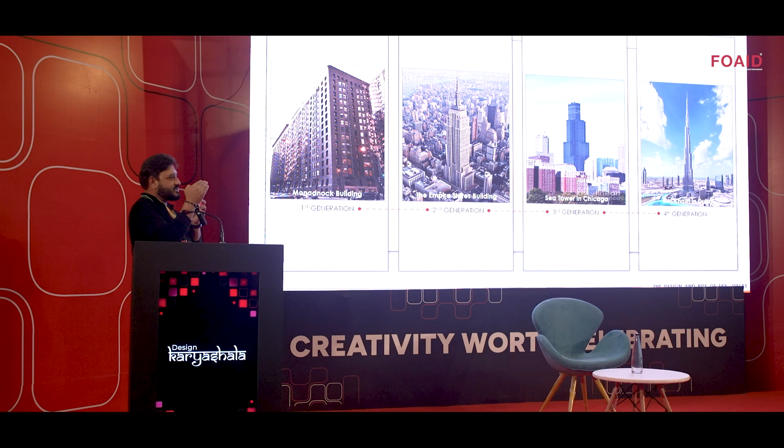The window ratio was small, and now we're in the third generation - complete unitized glass, DG glass, a complete glass facade. Now we have a combination of paneling and glass, and buildings are actually designed more on aerodynamics. A lot of people think designing a high-rise is very easy, but if you see Burj Khalifa, the shape has some reason - it was designed like that. It's not only the architect's design; it has wind loads, wind flows, and a lot of factors where the building shape is actually decided.

So what are sky villas? As I said, sky villas are residential spaces. So why sky villas? Because people may ask - I can own a villa, I have my own land - why should I have a sky villa? Sky villas are for when you have scarcity of land, and you get good panoramic views. Sky villas normally give you good ventilation because you're at a height.

It gives you a lot of fresh air, good sunlight, and good panoramic views, and you have a community to live. So these sky villas are just catching up. Some of the reasons: scarcity of land, increased demand of residential spaces.

Technological advancement also, of course. Now we have MIVAN technology. Before, a high-rise building of 40 floors used to take almost 4 years to complete. Now with MIVAN, the concrete walls and all, we can finish the building in almost two years if the sales are good.

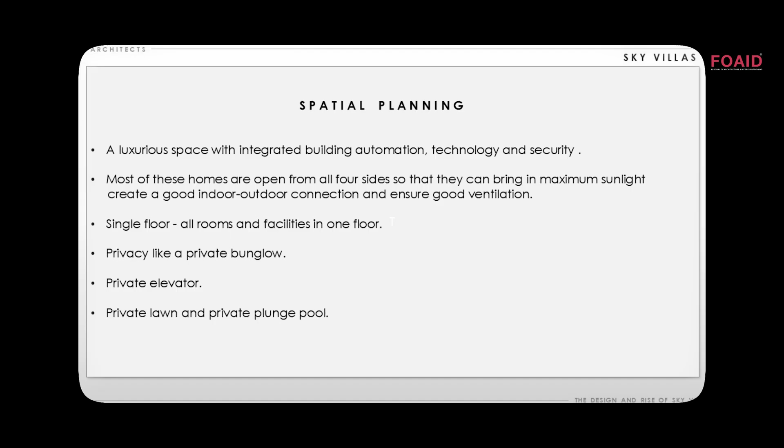Then why sky villas? Normally the frequent question we get from a lot of clients is: why sky villas? Why can't it be a duplex apartment? Why a single floor of 6,000 square feet, instead of a duplex apartment of 6,000 square feet spread over 2 or 3 floors?

But nowadays, even for parents monitoring kids, a lot of people are preferring single floor apartments because it's very easy to monitor. You are on the same floor, so all your living spaces, bedrooms, home theaters are on the same floor. It's very easy to have an eye on the kids and even the elders at home. When you're on 2 floors, it's always a little difficult to communicate.

That's why a lot of people nowadays are preferring larger floor plates. And of course, you have apartments with plunge pools, and then private elevators to your apartment. So it's a dedicated apartment with an access card.

So you can have multiple features like this. And because it's a single apartment, you always have that privacy, like an independent house in the sky. That's why we call them sky villas.

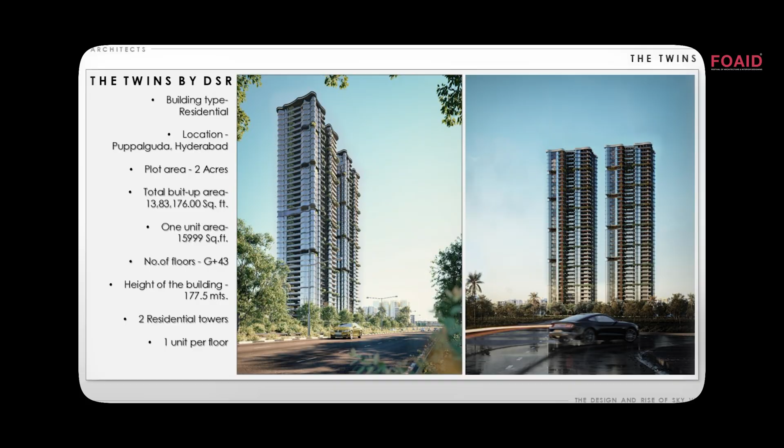So this is one of the first projects I want to show you today. This is the Twins, a twin tower we're doing in Hyderabad. We are halfway through construction - we have finished about 22 floors.

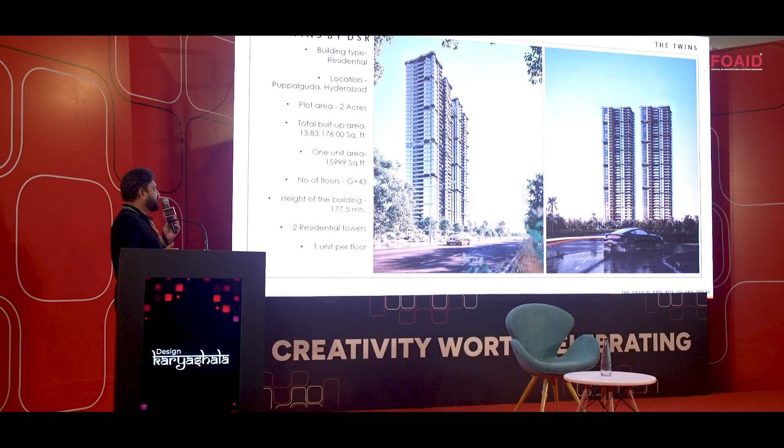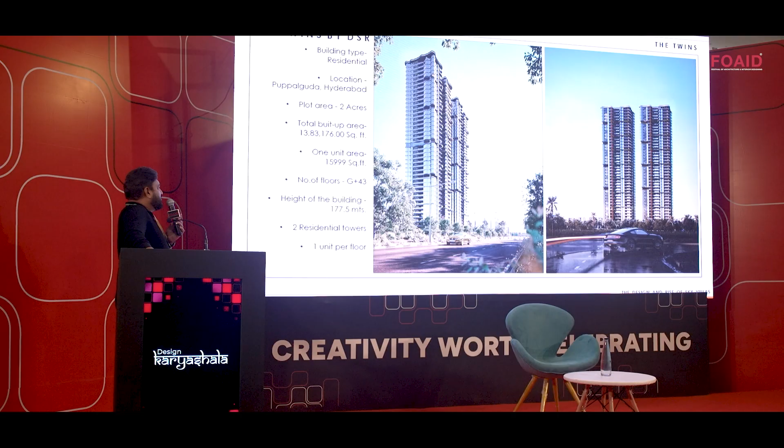The plot area is very small, about 2 acres, but still we could do about 88 apartments. So 88 apartments of almost 16,000 square feet each - 15,999 square feet. For each floor, you just have one apartment of 16,000 square feet. It's twin towers, and the height of the building is about 177 meters, with just one unit per floor.

If you see, this is the placement of the towers - we have a linear site with 2 twin towers. We have all the amenities on the ground floor. Ground and first floor have amenities like indoor banquet halls, multi-purpose hall, restaurant, lobbies, indoor badminton, and squash.

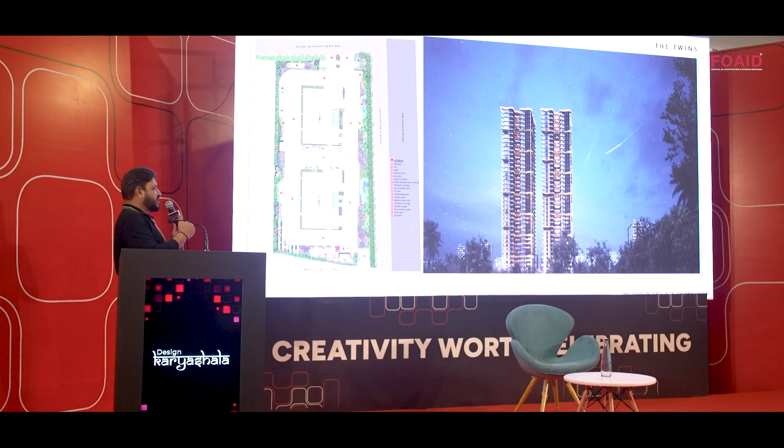So all the amenities are on the ground and first floor, and the first apartment starts from the second floor. This is how it looks. If you see the typical floor, the ground floor has the amenities.

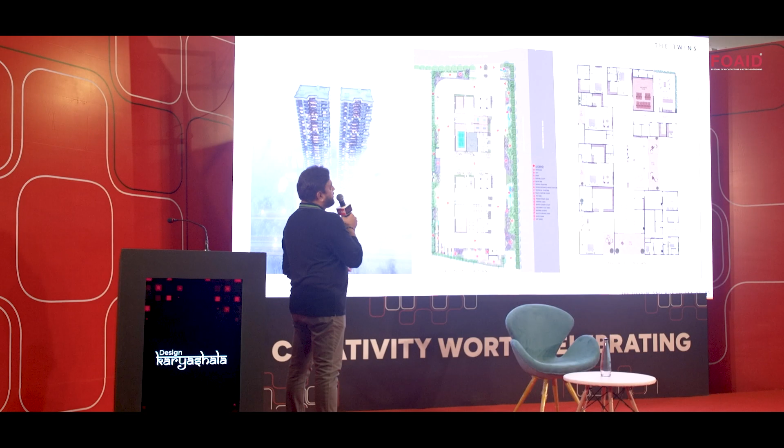A typical floor has dedicated entries on the right. If you look at the lift lobby, the core is attached, and then we have dedicated entry. All those lifts have access control.

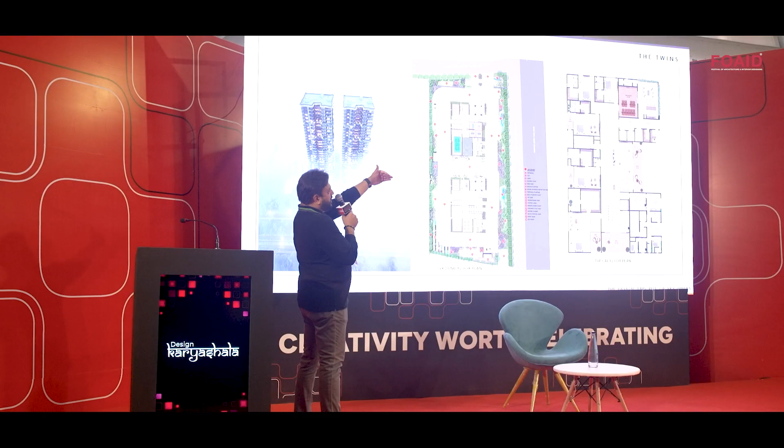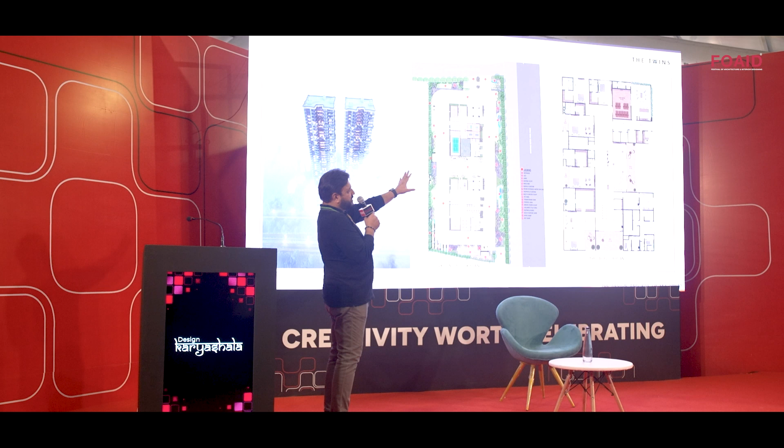Towards the right, you have the party area. We made the party area to one corner so that even if there are elders at home, when the kids want to party, they are not disturbed, but they're still at home. It's actually near the entrance, so people don't have to enter your residence - they can just walk in. We have an attached home theater to the party area.

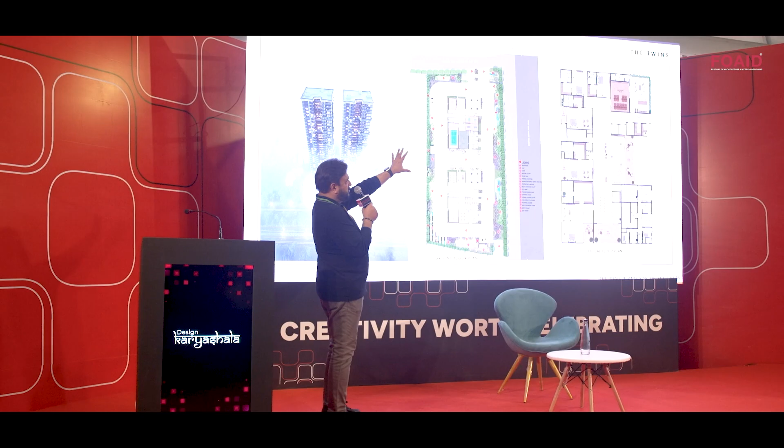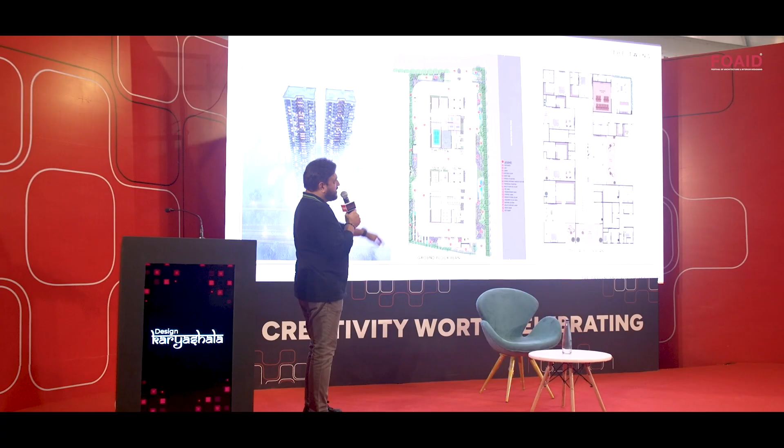This home has 5 bedrooms. We have maid quarters also tucked in the corner - 2 maid quarters, part of the kitchen. So we have the 5 bedrooms, home theater, party area, and large spanned living rooms.

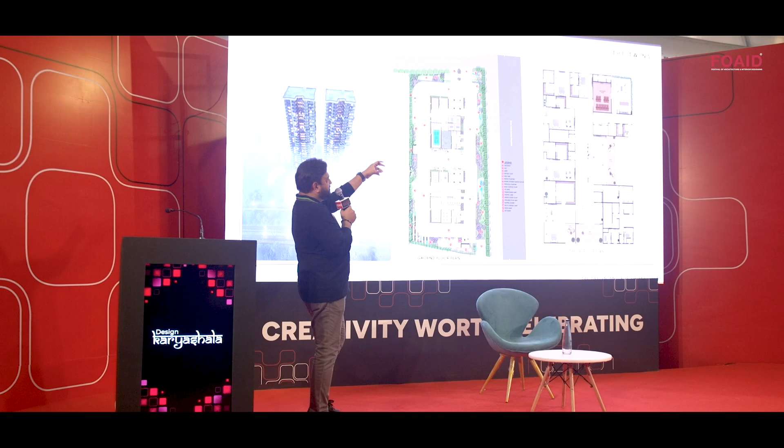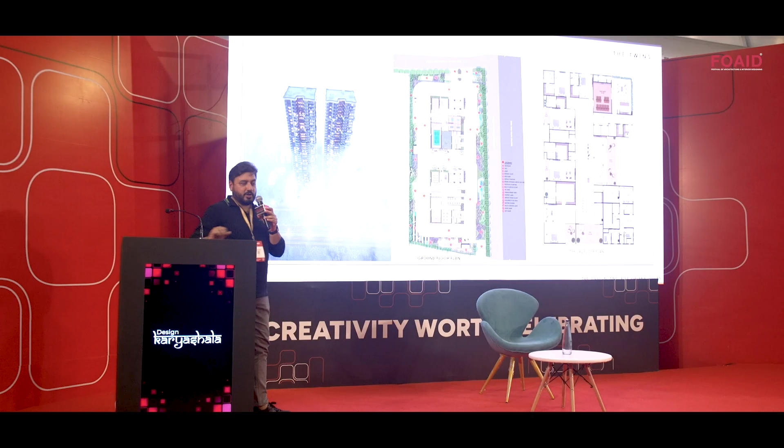Here we created these large open panels - the overall thing is very large format, each grid is about 30 feet. It was designed so the end user has his own chance to customize it however he wants - make it into 2 rooms or 1 room. That was another reason.

So this is how it looks. This is a curvilinear building - 50% of the building is glass, and 50% is concrete. This is also done in MIVAN.

And this can be done only when you have 50 repetitions - you should have at least 50 repetitions for each apartment. Then only this MIVAN technology will work. Otherwise, it will be very expensive compared to conventional construction.

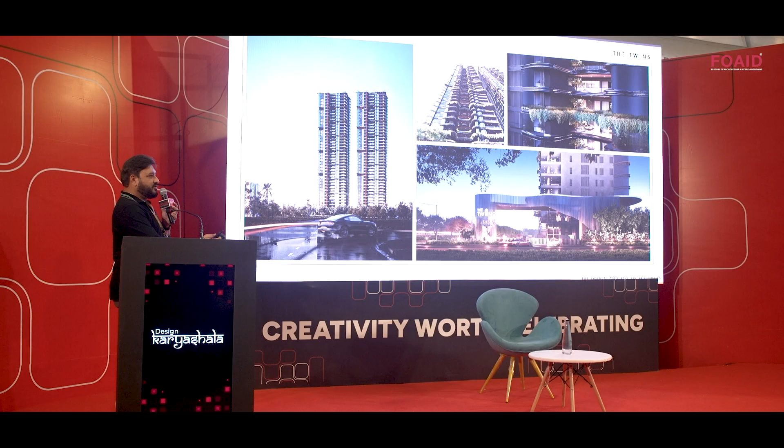So we have large balconies - I think we have 2 large sit-outs, about 500 square feet each. And then we have a dedicated party area also. So these are some of the visuals of the landscape.

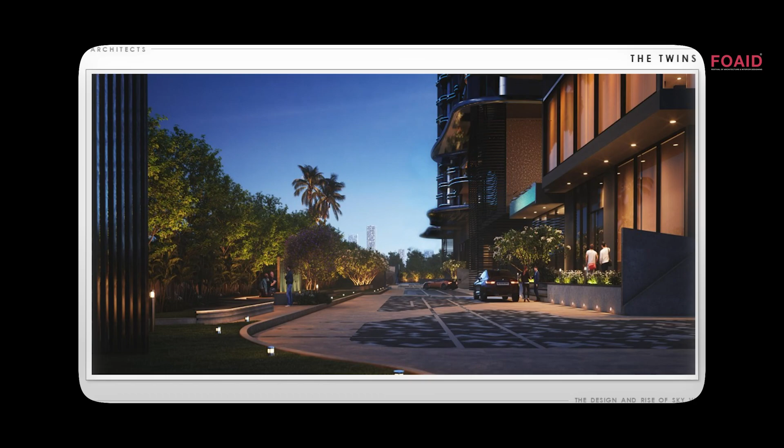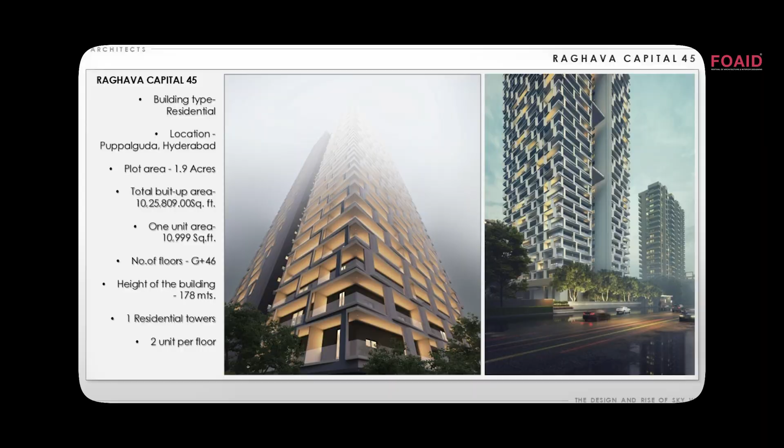So we move on to the second project. This is called Capital 45 floors, and it has 2 apartments on each floor, but each apartment will have its own privacy and will look very independent.

This is also under construction. We have finished about 15 slabs. This unit size is about 11,000 square feet. Each unit is about 11,000.

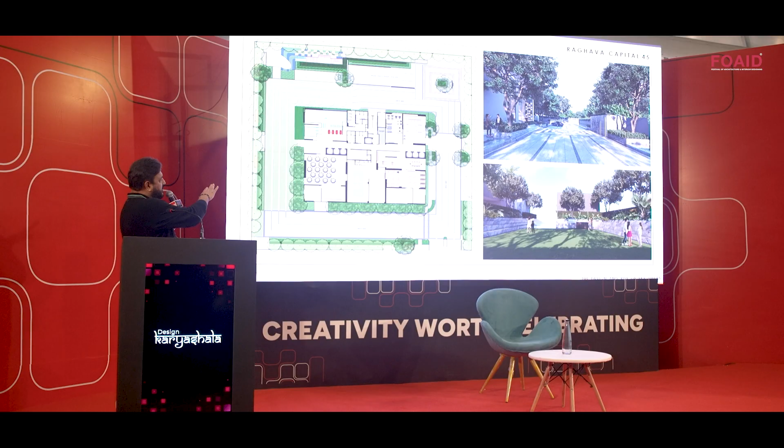Again here, because it's a single tower, all the amenities come in the ground and first floor. In this project we have an indoor heated pool on the ground floor, and a terrace pool also, apart from standard amenities like a multi-purpose shuttle, restaurant, and a multiplex screen.

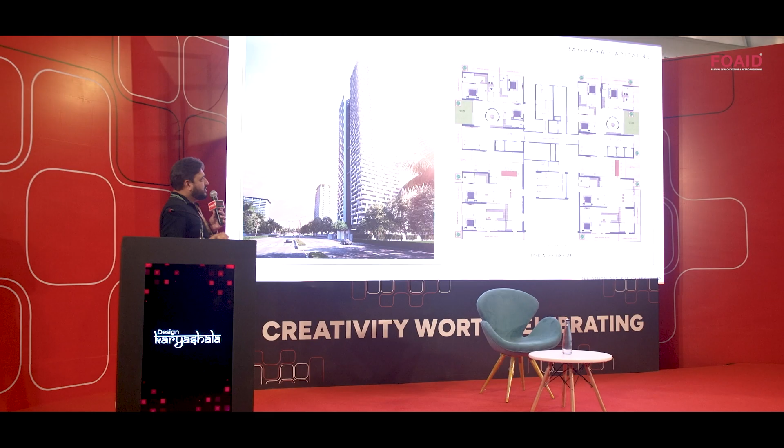So this is a layout. When you look at this, there are 2 apartments, but if you see the access of the lifts of each apartment, it's actually dedicated to that apartment. You don't feel you have a neighbor, because you come out of the lift, you have a lift lobby, and then it's your main door. The other apartment again has dedicated lifts, because the entries are from that side.

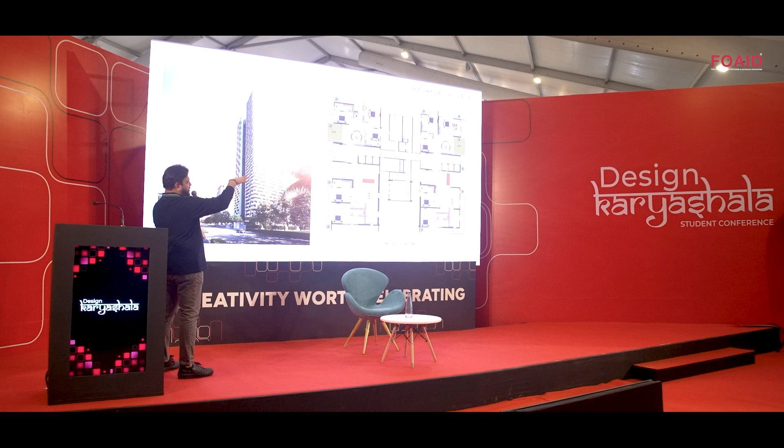Even though it's 2 apartments on each floor, you still have your own privacy, and each unit looks very independent of each other. The center core is just for service. We have given the maid quarters and the fire tower.

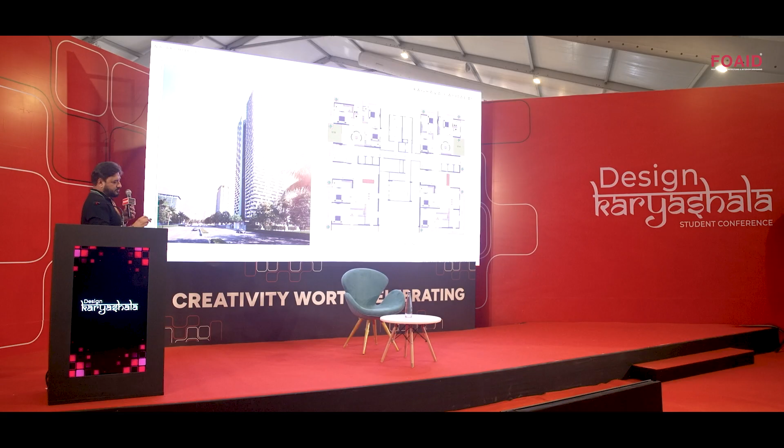This one also has about 4 bedrooms, a multi-purpose hall, and a home theater. When you do these large sky villas, at least one large covered sit-out is needed, say 300 to 400 square feet, because when you do a larger apartment, the volume and sizes of each bedroom should all increase.

It's not that one room we give big and then suddenly narrow it down. As the scale increases, the scale has to be shown in every room, not only in one particular area.

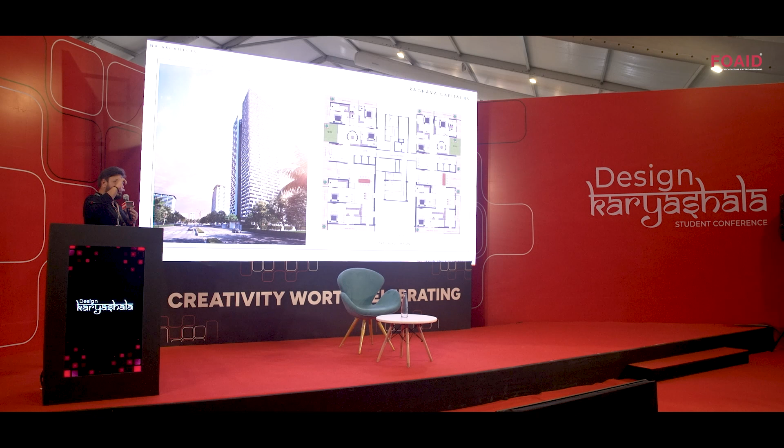Another important thing: when you do these large floor plates, the height of each floor has to be at least 3.6 meters. Because with large volumes, if the floor height is low, it doesn't give you that luxury feel. Normally for an apartment of 2,000 to 3,000 square feet, 3.15 meters is always good.

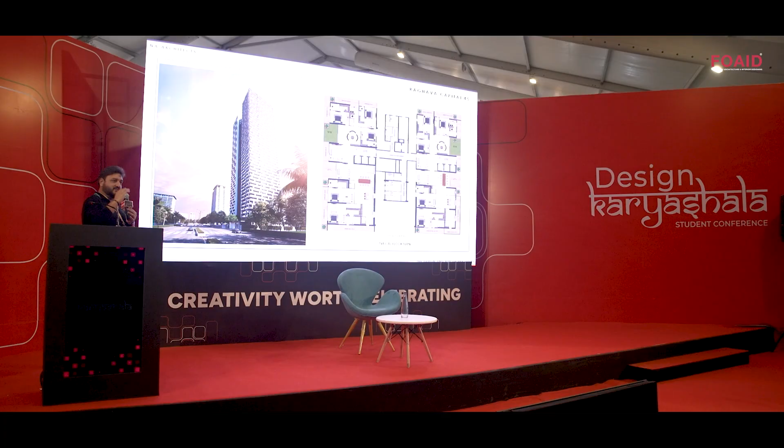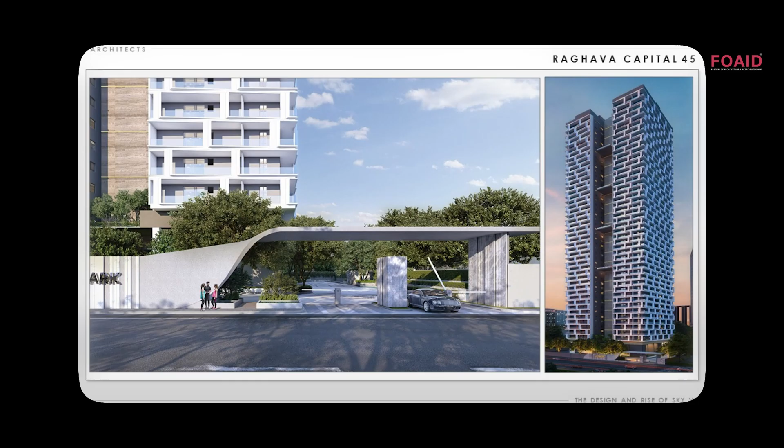But when you design apartments on a large scale, at least some of the apartments we have given 4.5 meters floor to floor height. This one is about 4 meters floor to floor. These are some of the visuals, and this is the main entry.

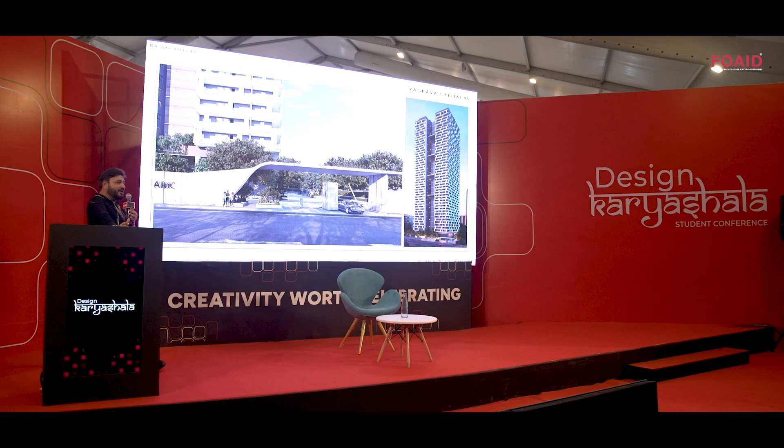Another important thing for students: when you do builder or developer oriented projects, your facades have to be very cost friendly also. Very rarely, say once in 2-3 years, do we get a project where there is no budget constraint.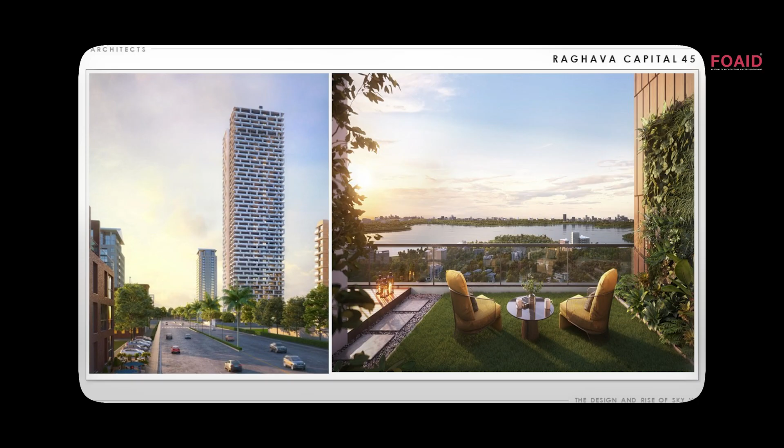But normally that's how it was, and even in this project, if you see, the fin is just a repetitive fin which goes all along the building. But it still looks very nice, it still looks very unique. The cost is kept low because everything is done in concrete.

So all these fins are repetitive and done in concrete, keeping the cost low, but it still looks iconic. That is what we need to concentrate on when we design for a lot of developers. Here, I've created just one fin and it just repeats multiple times, creating that kind of effect.

When you place the fins, you always have to be very careful. Most people, at least in Indian conditions, don't like to see a fin when they look out of their windows or glass when they have views. So the placement of fins is also very important.

So this is a sky pool. Here we have the sky pool, the cabanas, and floating seating. On the other side we have a small part here. This is the full terrace we have done.

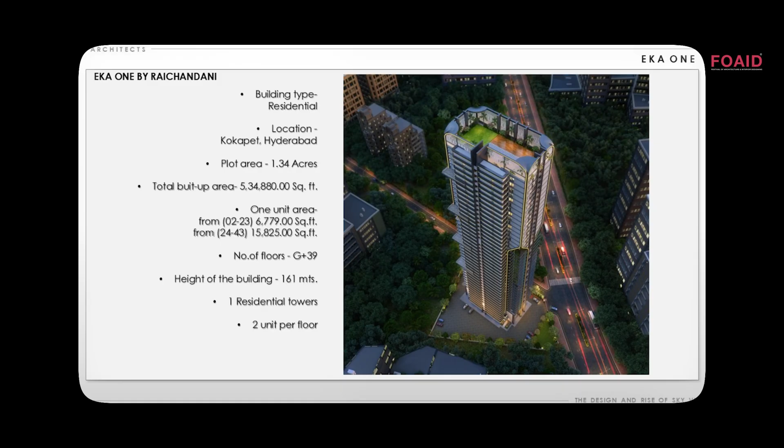This is another project in Hyderabad called Eka One. Here again it's a large format. But if you see, the first 23 floors have 2 units of 6,700 square feet each. After the 23rd floor, we have a transfer slab, and then the 2 apartments merge into 1 apartment of 15,825 square feet. So for the first 23 floors you have 2 apartments, and then it becomes 1.

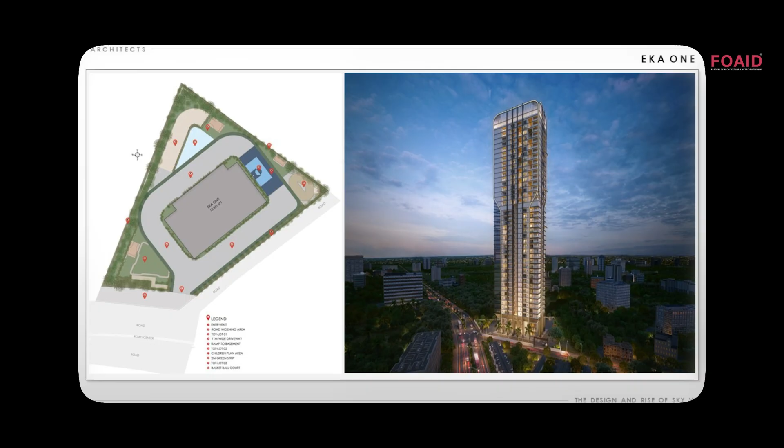So this is almost finished, we've completed the structure, and the finishings are going on. This is a site in Hyderabad, and in South India we have a lot of Vastu constraints while designing apartments. The apartment has to be a proper rectangle or square, it cannot be an odd shape. So we had a very odd shaped site.

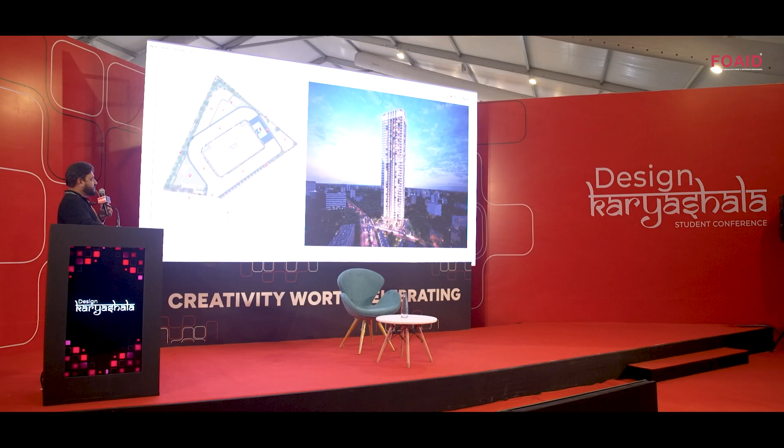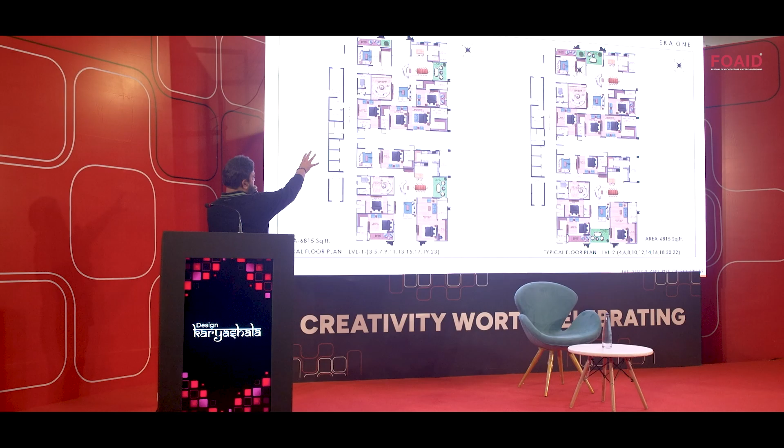So we had to fit in one proper rectangle and then do the landscaping and other services all around it. Here we have the ground plus first 2-3 floors with all the amenities. The first 2-3 levels will have 2 apartments each, and here you can see this is a corridor, so entries are very different, yet you still have your privacy.

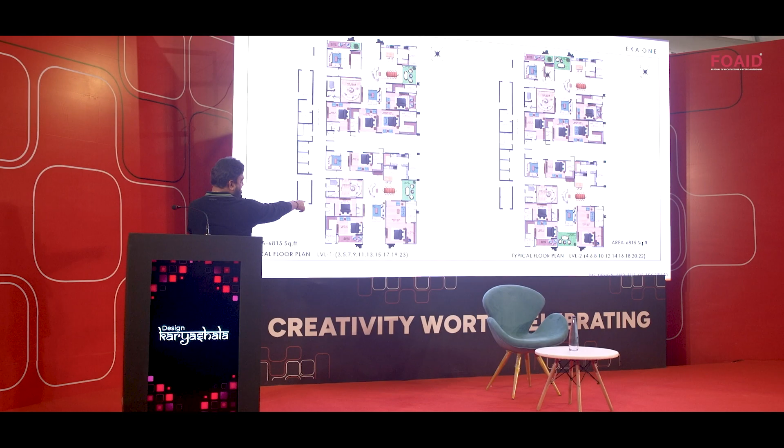We have given the sit-outs double height here, that's why the plans change every alternate level. One apartment will have a double height sit-out on this side, another will have it on the other side. So we've given double height sit-outs on alternate floors. This is the upper level floor where we have a single floor plate.

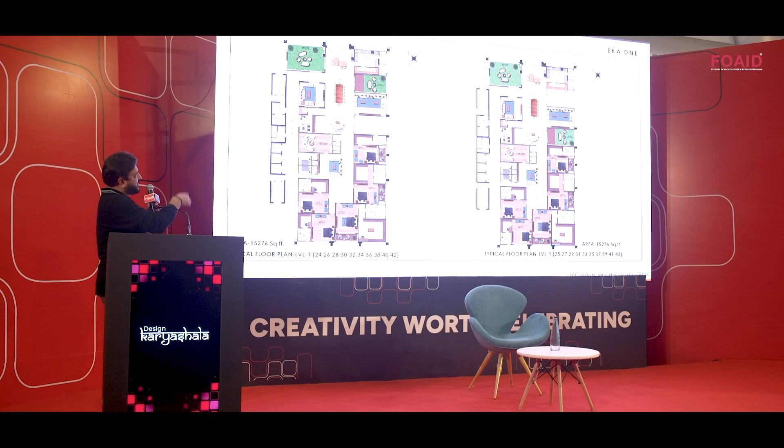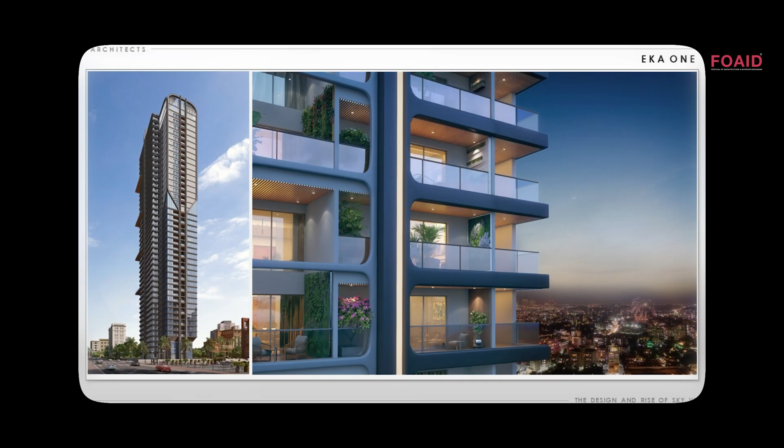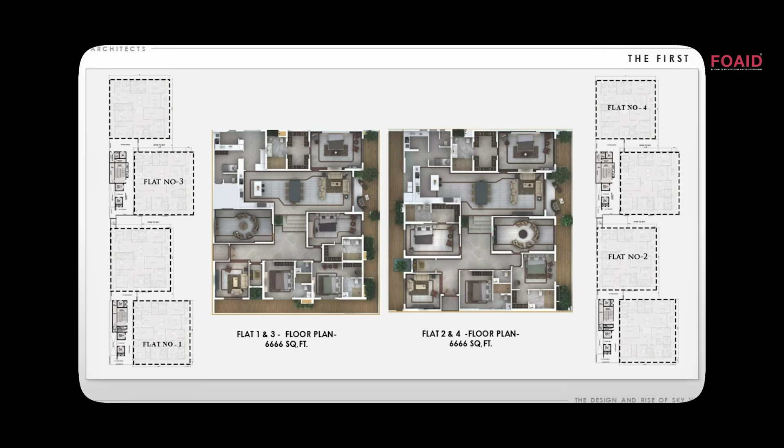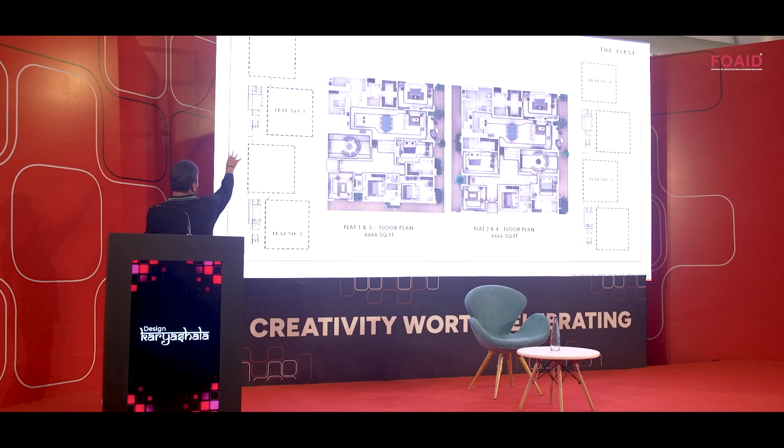What we have done here is create different cores, so even if you have 4 apartments on each floor, you don't actually see the other apartment. Each apartment is like an individual sky villa, with dedicated lifts. We have done this orientation to give more ventilation and more views.

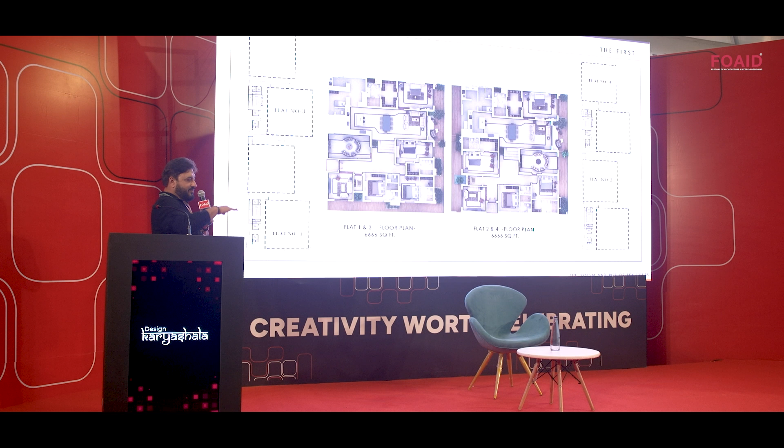In this apartment we have done a step, like an independent house, with 2 levels within the apartment. So this part is about level 0, and the other one is about 450 mm high. So we have steps, it's like a step-level apartment.

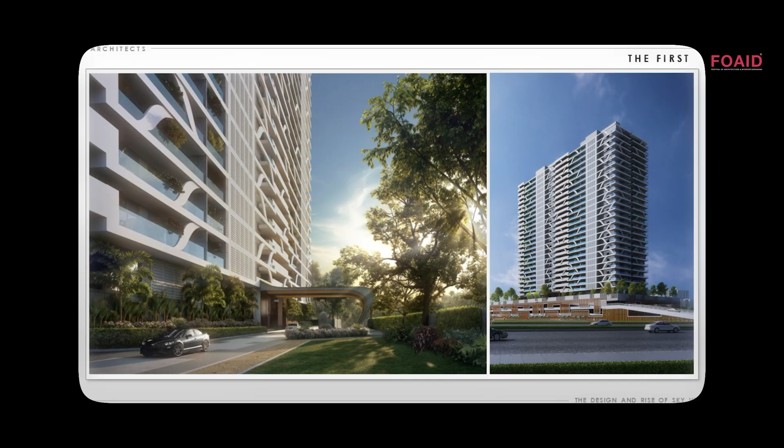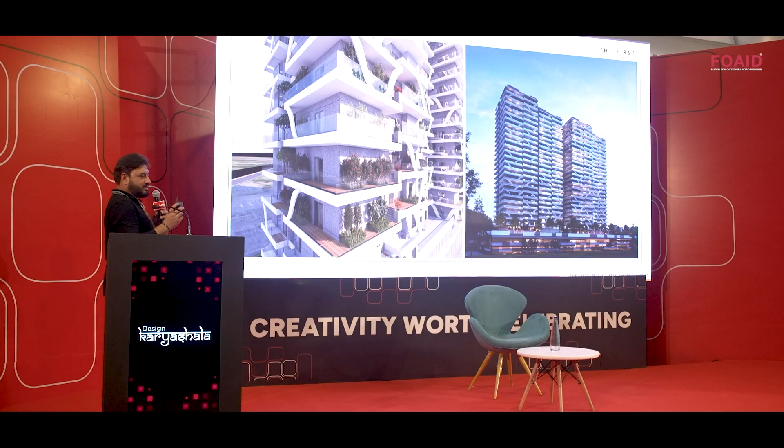These were the renders. Here again, it's just a repetitive fin I've used, all done in concrete and then paint, that's it. So it has less maintenance, and it will remain like this forever.

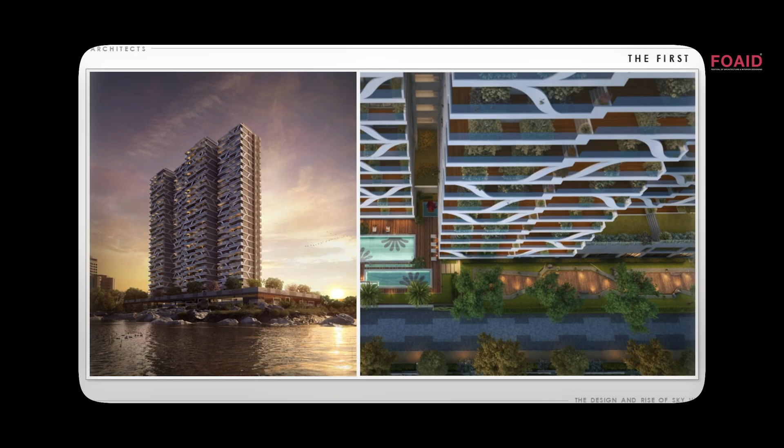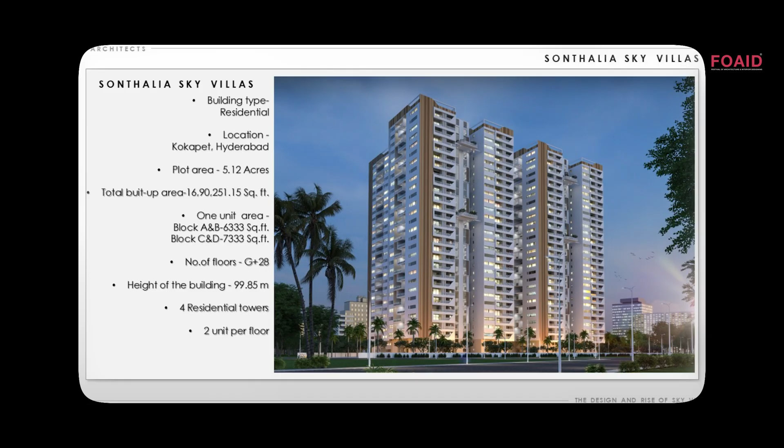This is another project called Sonthalia Sky Villas. The sizes here are 6,333, 6,333, and 7,333. We have 4 blocks here, and this is almost at completion stage, maybe in another 2 months the project would be completed.

So this is the layout. Basically the site is about square, and we have 4 blocks - 2 blocks of 6,333 and 2 blocks of 7,333. This is the orientation, and here we have 2 apartments for each floor.

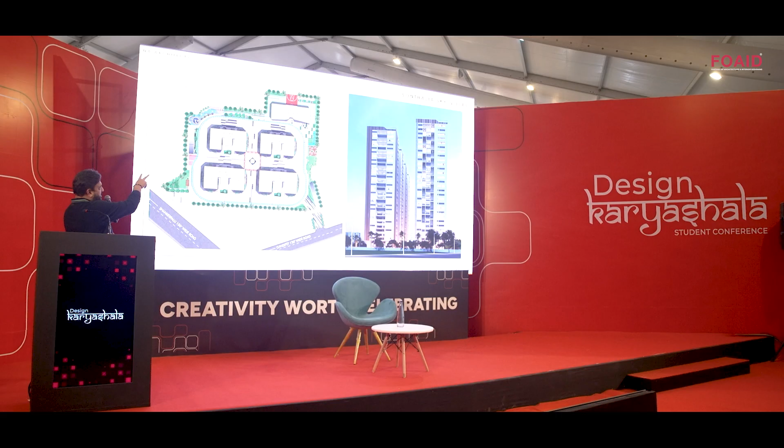These apartments, if you see the 6,333 type, there are again 2 apartments for each floor, but most have separate entries. In the center core we have servant quarters, maid quarters for this apartment and that apartment, but the entrances are very different.

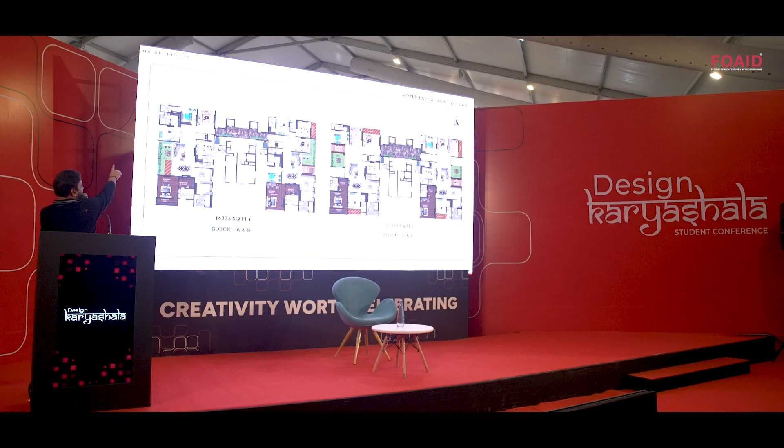If you see most of the apartments we design, we have large sky terraces, which are needed because that's the place where the family could meet and get together. It can be used for multiple purposes with a good view, so giving large terraces is very important.

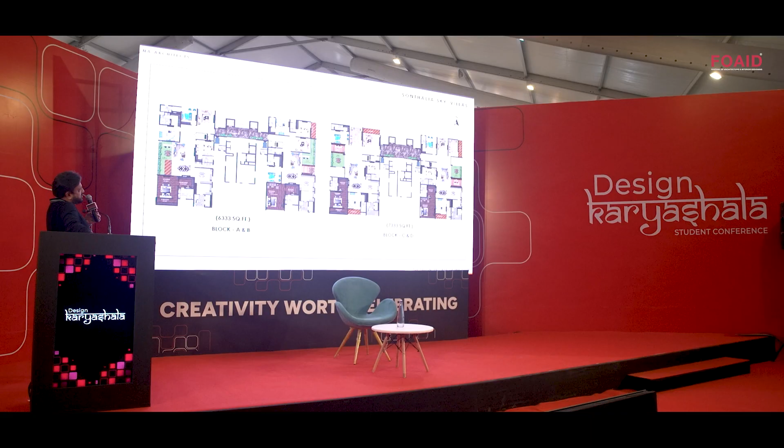Here also we have some double height terraces, but we have done it in a very different way. I'll show, I think some of the renders are here.

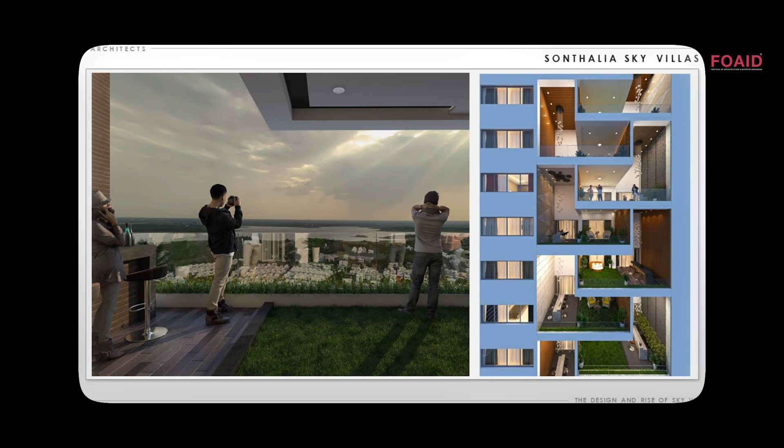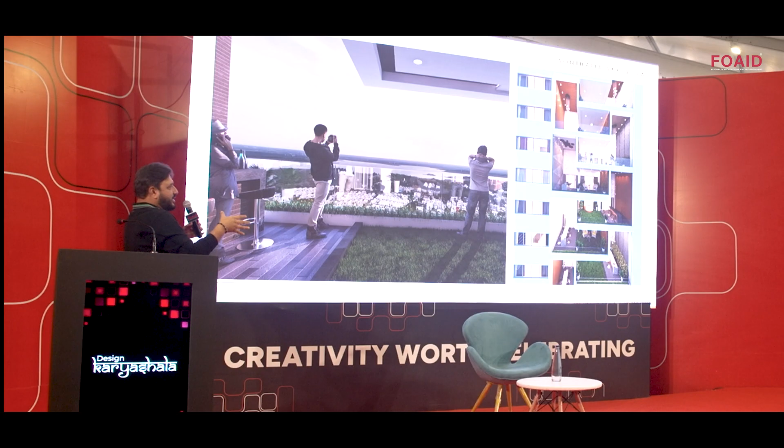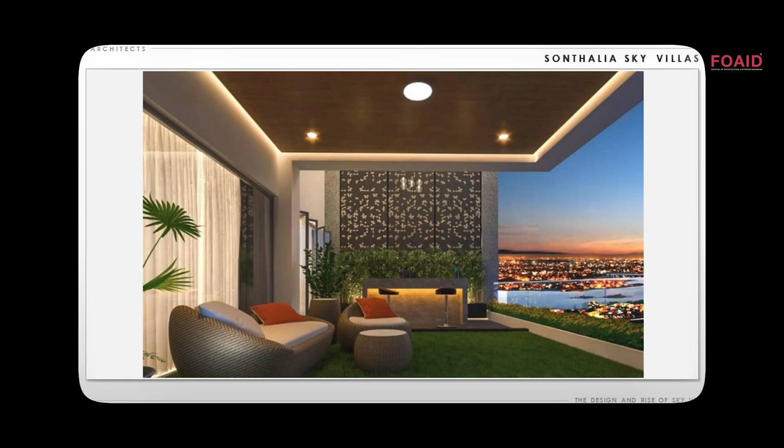If you see, on the right hand side, part of the balcony is double height. We didn't have space to give the full balcony double height, so we gave part of the balcony double height, alternating so every apartment gets 50% of the balcony as double height. This always gives that kind of luxury, and this landscape is almost finishing, probably in another 2 months.

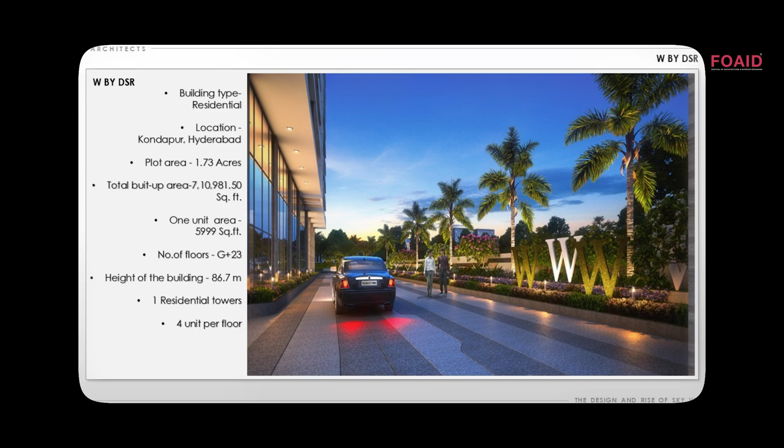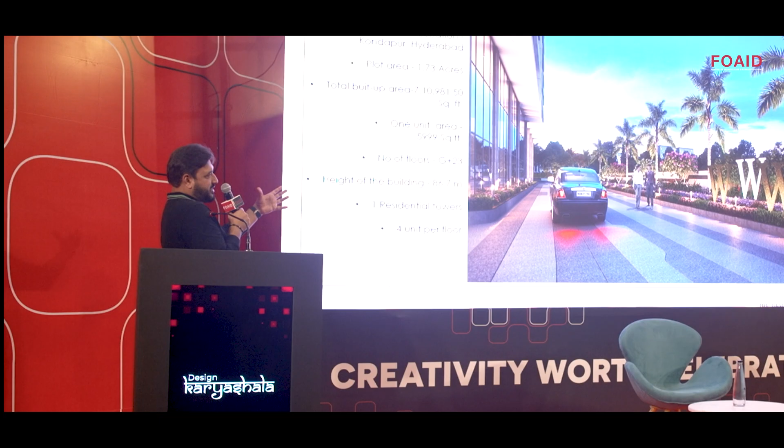The next project is called W by DSR. This is again G plus 23 buildings. So here we have 4 units, about 6,000 each. And again, this is a small area for a high rise, about 1.73 acres.

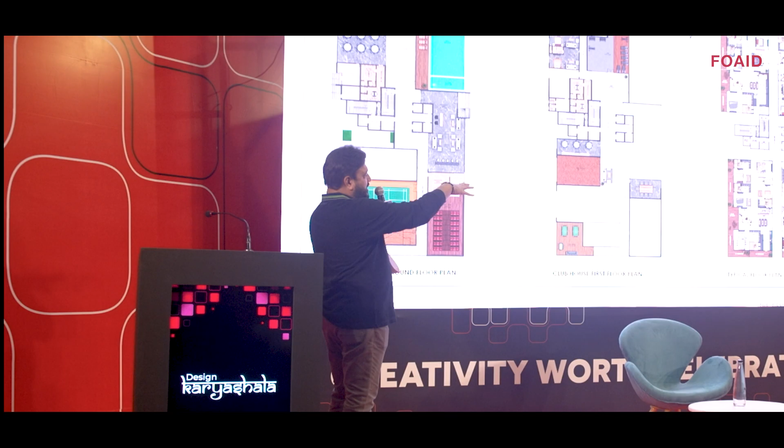So this is the layout. As we had in other projects, the clubhouse and amenities are mostly on the ground floor. So typical floor, we have 4 apartments, and each apartment has a dedicated private lift. It's not that very private, but because of the private elevators, each owner would feel very independent.

So actually why this project was called W, before we started the project, the client had named his venture W. There's no particular reason, but he named it W. So then we thought, why can't we do the facade around W? So then what we did...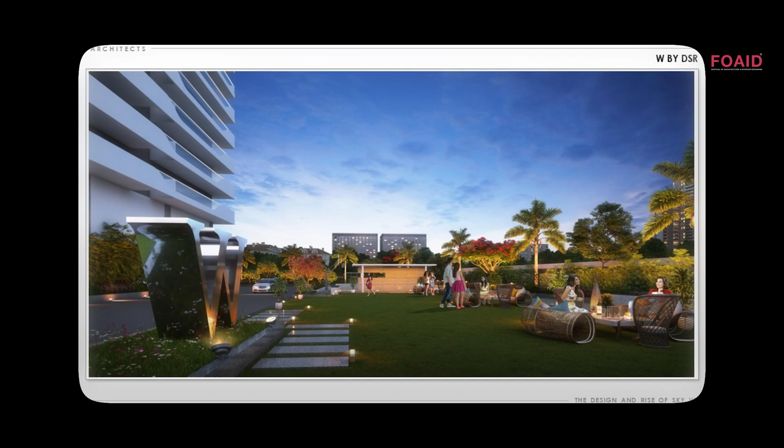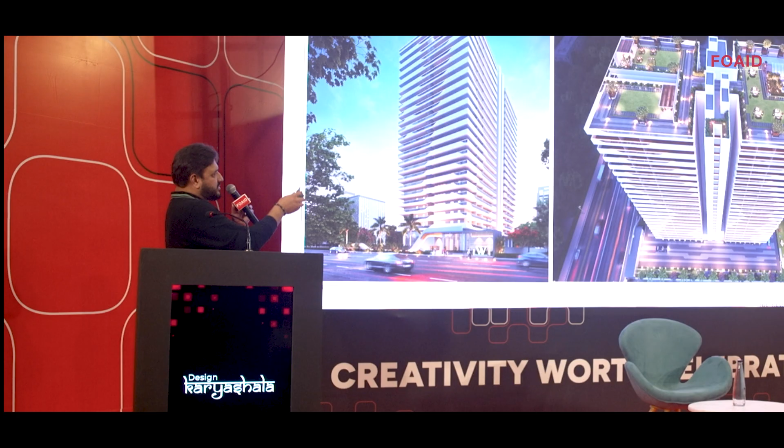So here if you see this corner, when it is in one corner, when you see the elevation, it gives the W in the facade. So what we have done here, again, there's nothing very expensive material, no claddings, nothing. It is just I've played with the parapet wall and the glass. We've given this facade and all the parapet railings have lights, so that creates the W, and I've given the shape of the parapet walls such that it creates a W in the corner.

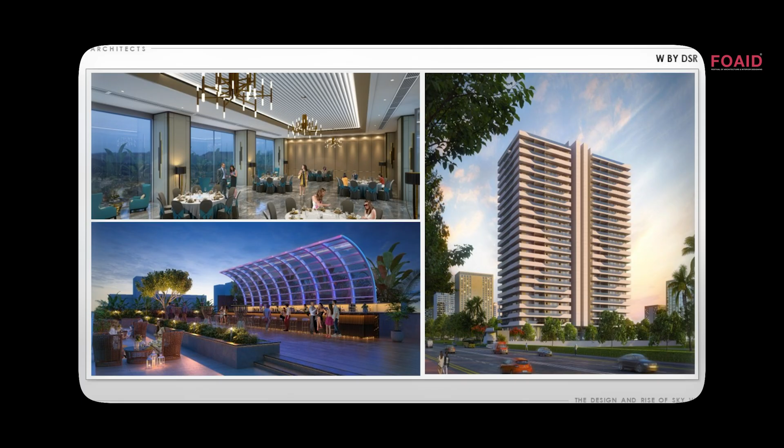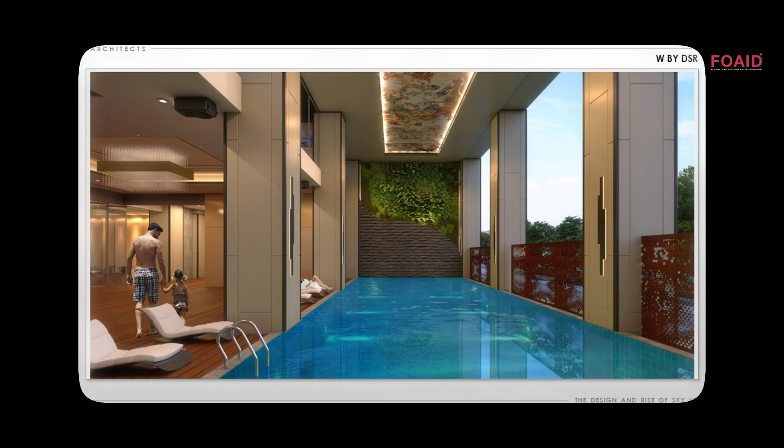So this project is almost done, it's getting finished. There's a rooftop bar which I have given for the residents apart from the regular clubhouse thing. We have an indoor heated pool as part of the amenities on the ground floor. Some of the lobby designs.

The last project I would be showing is Skyline. This is about 234.3 meters, as of now South India's tallest tower. We have 4 towers in this project. The first block will have about 12,000 square feet floor plate each. Then B and C, about 7,400. And then another tower with 6,300.

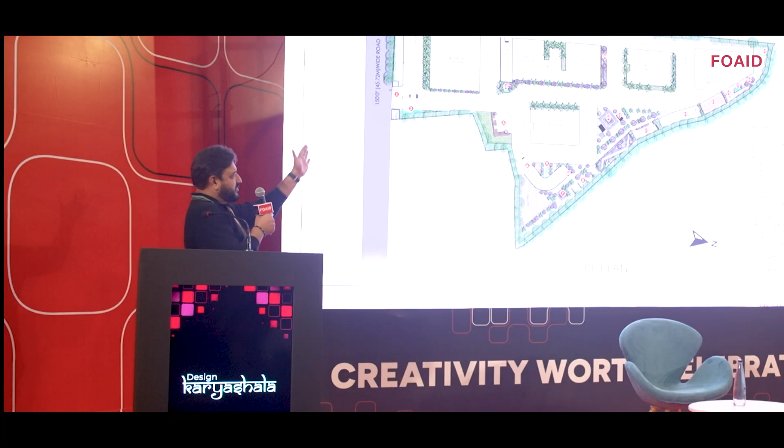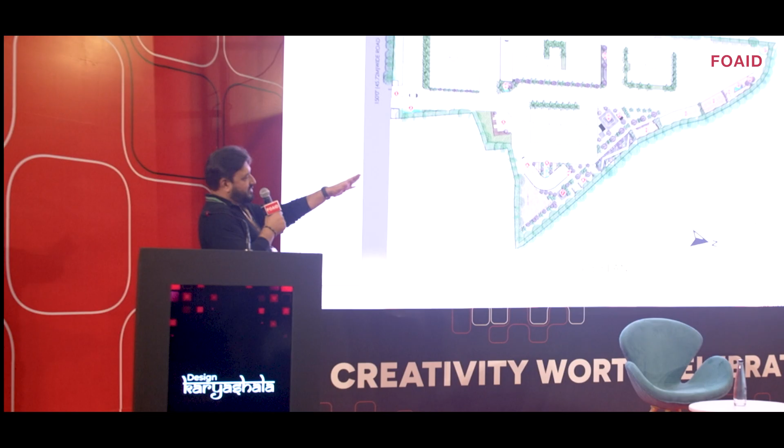This has just started, we have finished basements and we are on the 4th slab. Again, if you see, this site is very tight, not as per ideal proportions. We have a small canal going on one side, and when you have these canals, you always have to leave a buffer. So there's a 9-meter buffer we have to leave, and still it is a very tight site for 4 blocks, plus a separate clubhouse on one corner. But we still managed to do it.

So this is the first block, A block, facing the road. And this is the plan we've done. So this is one apartment per floor, 11,000, almost 12,000 square feet.

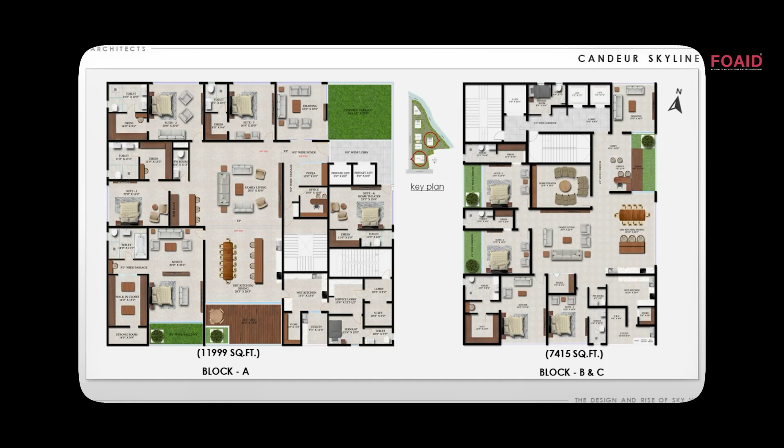Most of you would be wondering why it is all squares and rectangles. Because in Hyderabad we have vastu constraints for most of the rooms. But I still feel square blocks or rectangles give you more circulation, more space in the room than a curvilinear curved shape. So whatever facades you want to do, that can be on the facade, but taking the building into round shapes like in most international projects—we also have an office in Dubai, so we do a lot of projects there—but when we do that, we're not very comfortable, because most of the rooms and balconies get cut in round buildings. You don't get efficient space. I think anything square or rectangular is always better.

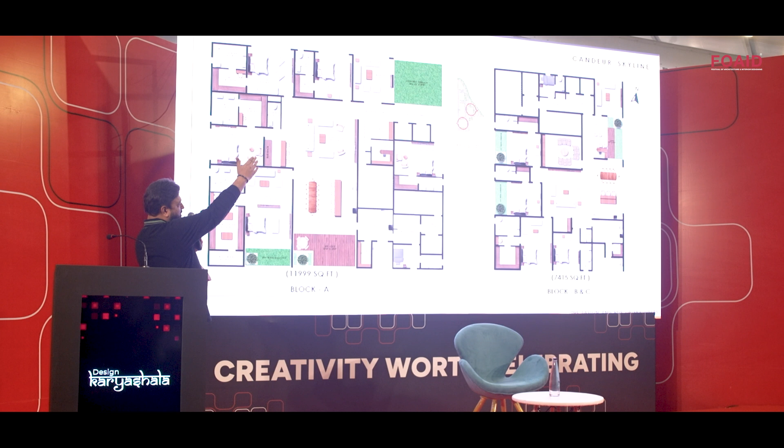So that's the second, B and C block, which is 7,400 square feet, again one apartment per floor. The entrance is on the right-hand side, we have the lobby, and I think post-COVID, most of these apartments we design—even in 3,000 square foot apartments—a home office has become one of those needs. So home office and home gym, we include in most of them.

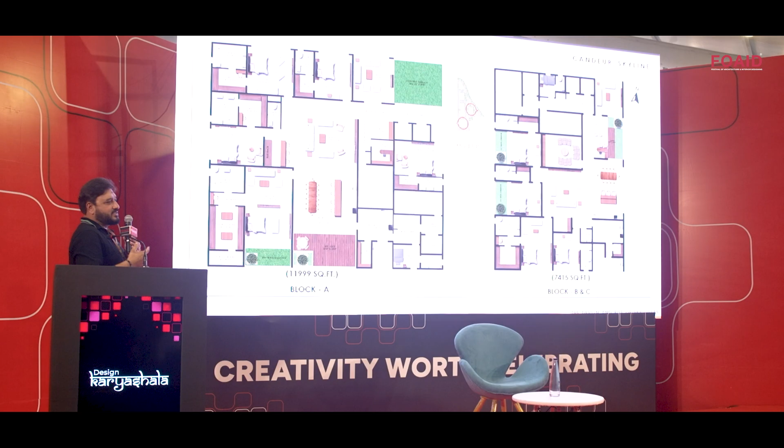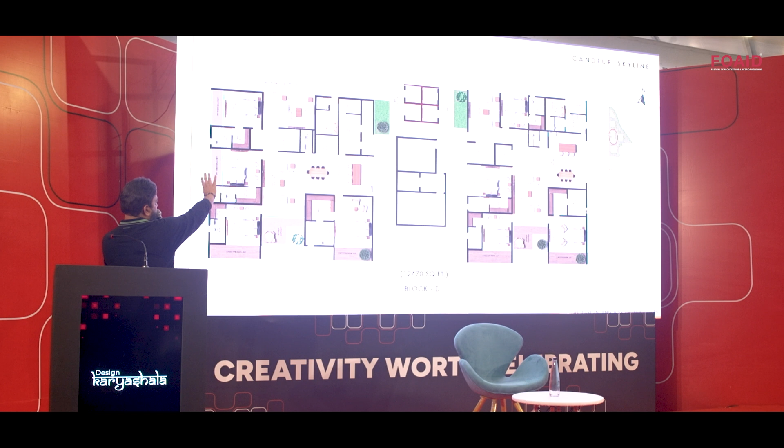And then there's a fourth tower which has 2 apartments, about 6,400 square feet each. But again, the entries have been very segregated—this apartment has entry on this corner, and this one on the other, and even the lifts face opposite directions so they don't face each other.

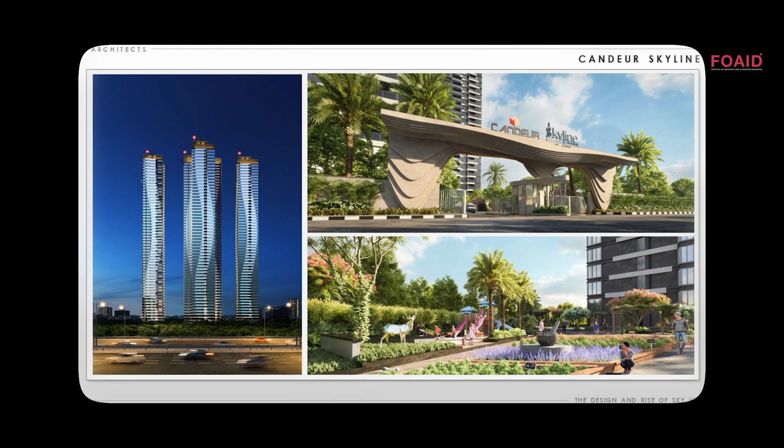So this is the facade and entrance arch, 4 towers in all, and this is about 70% glass facade. These towers have helipads—it's not the builder's requirement, but as per NBC and fire department regulations, any tower above 180 meters needs to have a helipad.

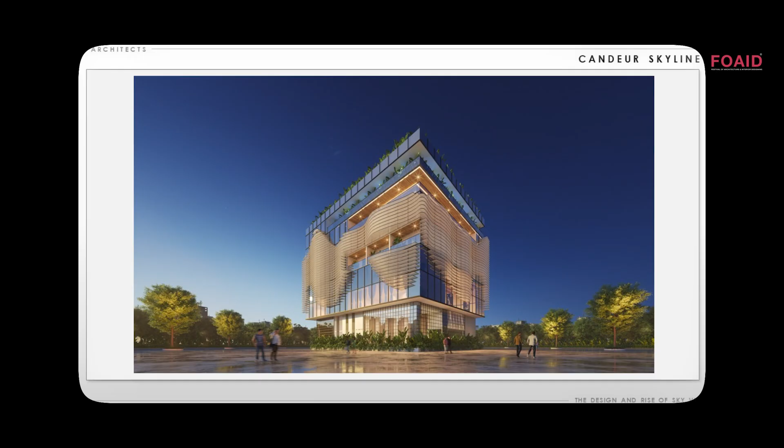This is the separate clubhouse, which has all the amenities across 5 floors. Yeah, that's it.